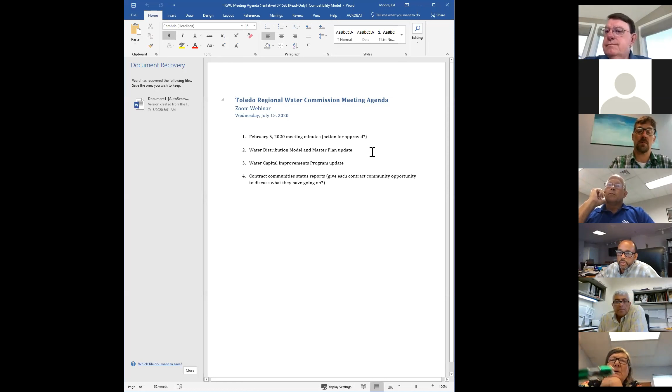No, Jim, as you know, we were going to do both the distribution model update along with the alternative water source update, but as we've said before, they're not ready for the alternative water source update. We'll do that at the next meeting, so it'll just be the distribution model and master plan by AE, along with the improvement program update.

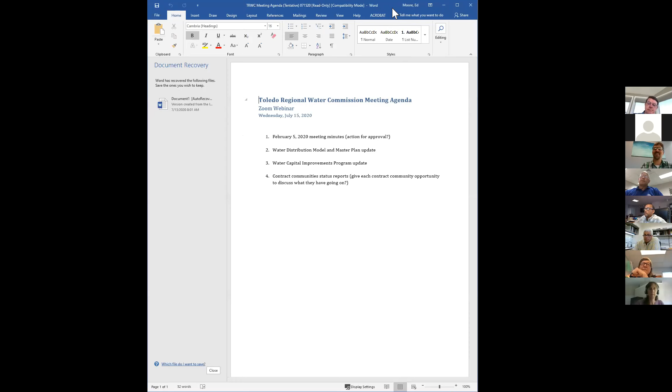I'll start with City of Toledo, Ed Moore, Director of Public Utilities. Patika. I have too many screens up. Patika Bannister, City of Toledo. Jim Shaw, Lucas County. Admiral Salem, Fulton County. Steve Pilcher, Village of White House. Tom Stalter, Northwestern Water and Sewer. Alice Godsey, City of Perrysburg.

And it looks like we have Kevin Aller on there, but he's muted. Kevin, you with us? It looks like he just dropped off. All right, we'll make a note of that when he returns. It appears that's it from the contract communities, unless I missed somebody. I'm not seeing any other communities right now.

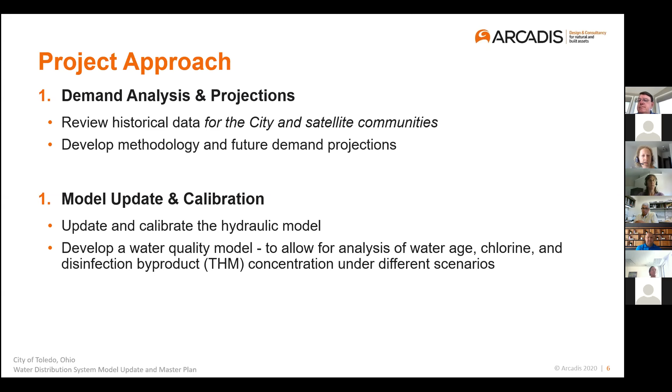Thanks, Jim, and good morning to everyone. Just describing the overall approach and the tasks involved in this project. There were four main efforts: the demand analysis, projections, and the model update and calibration. And those two really provided the tools that were needed to dig into the next two pieces. And then, again, the two pieces, the model simulations in order to evaluate conditions, which led into the storage alternatives analysis.

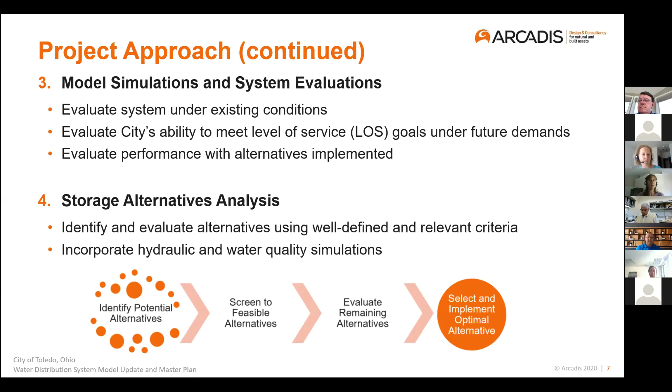So the first thing that we'll talk about is the demand analysis and projections.

We looked at three different types of usage for projections moving from now through 2040. The first was the City of Toledo and Lucas County customers. We looked at them in more detail because we had the billing data, and those customers are also directly included in the model.

So we looked at current usage per customer, including residential and business customers. We looked at expected future usage per capita and per employee, taking into account national, regional, and local trends in water usage, which in general are showing decreases in usage.

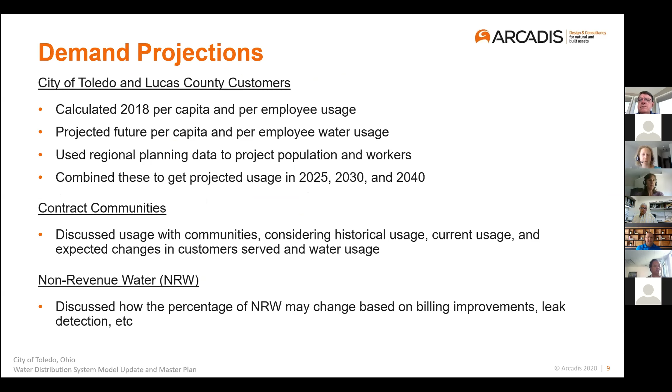For example, water saving appliances such as washing machines, dishwashers, and shower heads are resulting in decreased usage in households. We also considered regional planning data, including from TMACOG, the Toledo Metropolitan Area Council of Governments, and brought all that information together to get projected usage for 2025, 2030, and 2040, looking 20 years into the future.

We then looked at usage by the contract communities. We didn't have as much detailed analysis since those won't be directly modeled, but we worked with them to look at current usage and expected changes.

We also looked at non-revenue water. Toledo, like every utility, does not bill for all of the water that's produced, and that water can be lost in a variety of ways, including firefighting, leaks, and billing errors. So we looked at how that might change into the future to get these projections shown in this figure.

There'll actually be a contract community added in Oregon in the next several years that will increase system demand, and several communities are expecting growth, including significant industrial growth that will increase their usage.

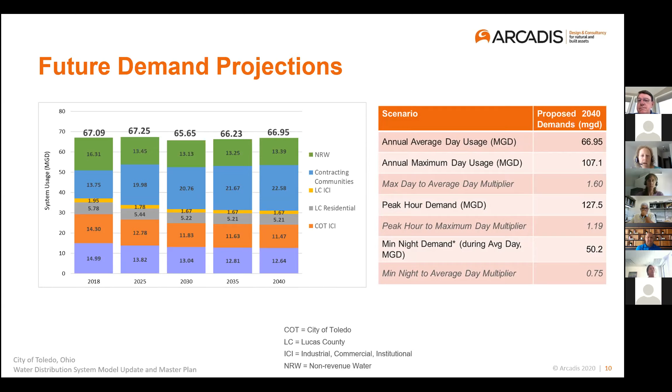That projection information was used in the model update and calibration. Instead of using the previous model and just tweaking it, we actually rebuilt the model based on the latest GIS, which ensured we had the most up-to-date and accurate information.

We also used billing data to do very specific and accurate allocation of demands, and we updated facility information to make sure we were matching the configuration of those facilities and how they actually operate.

For the contract communities, their pipes and facilities were not included directly in the model, but instead we used point demands and considered their usage, as well as SCADA data to look at how that usage is distributed.

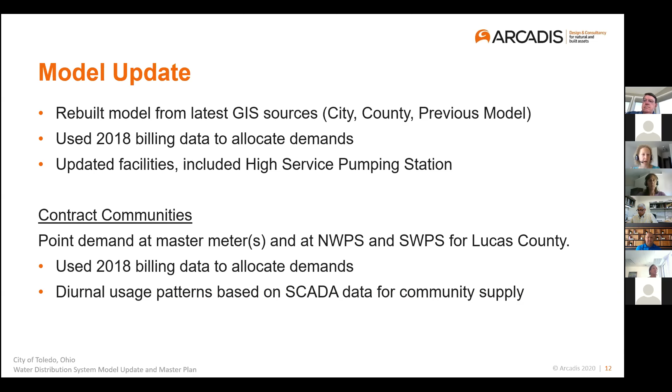After the model was developed, we moved to model calibration, which I'll describe quickly. The goal of calibration was to have the model results be within 7% of the observed value.

All of the SCADA data that was available was either used to set up the model or used to calibrate and check it. We did two types of scenarios: extended period simulations, looking at both an average day and a max day.

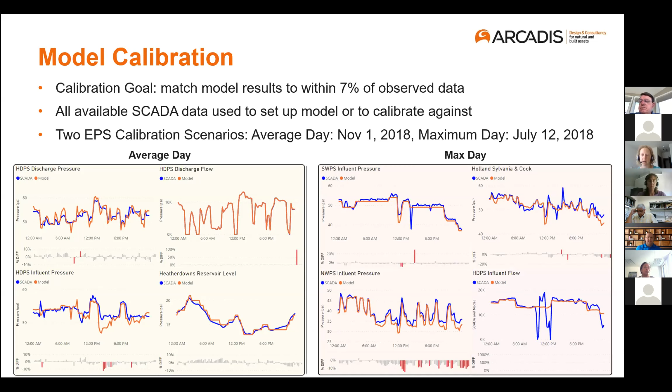Most of them match very closely in terms of actual values, as well as spikes, drops, and changes in the data. There were some differences, and the bottom right is an example of an area of the system that we had to dig into a bit more to get a better match. But at the time these figures were developed, that one had some issues.

I'm going to now turn it over to Jennifer to talk about the performance evaluation.

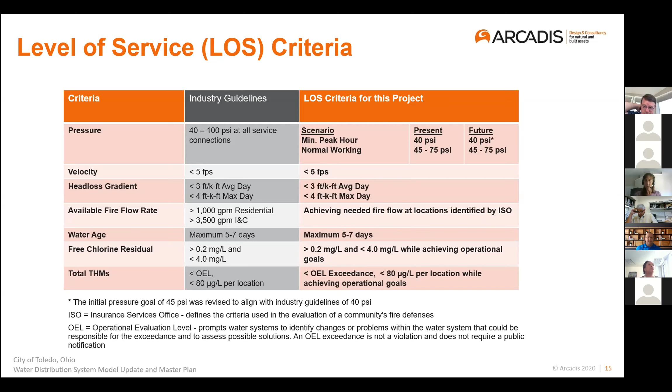In terms of the actual evaluations that we did in the system, all the evaluations were run under an extended period simulation, which represented a 24-hour period of time. This takes into account the diurnal water usage throughout the day, in which it brings in various times of the day when you have peak hour demands and you have low water usage demands as well. And so what we looked at in our model results was primarily minimum or maximum values, for example, minimum pressures during peak hour, or maximum pipe velocity during peak hour. So they all ended up corresponding to kind of the peak hour demand condition.

We looked at the existing system under the 2018 demands, as well as the 2040 projected demands. As Katie showed in the graph earlier, we don't really anticipate a huge overall change in demands throughout the planning horizon. So we felt comfortable with just looking at the beginning and the end time periods to look at anticipated changes in terms of deficiencies, where those deficiencies may be.

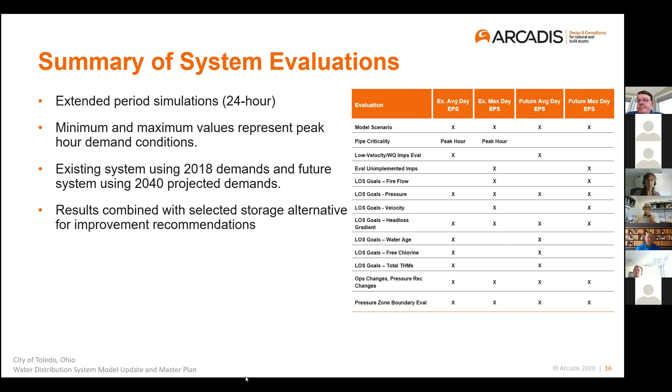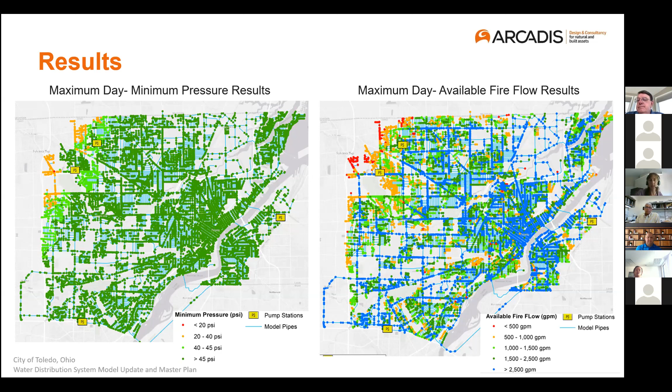This is just an example graph of some of the model results that were obtained. We did color coding of all the different criteria that were shown in the previous slides. This was an example on the left of, under the max day, what the minimum pressures were, and then on the right was an example of what the fire flow results would look like. And I believe these were under existing system demands. This was the initial. Again, these were just examples to show you how we were able to evaluate the locations of these deficiencies.

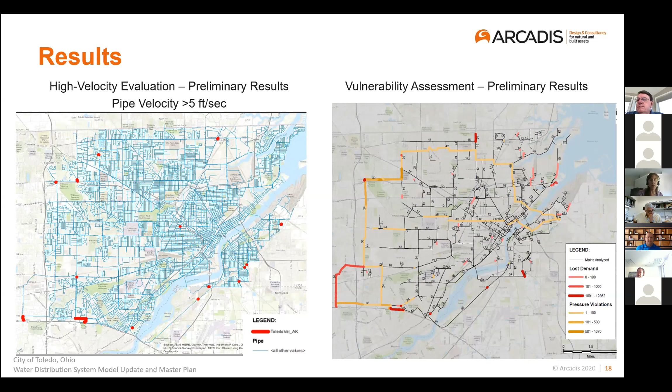And then the next slide here just shows an example of the high pipe velocity evaluation, locations where we saw greater than 5 feet per second. And then on the right, this was a separate criticality analysis where we were looking at the water mains: if a specific water main was taken out of service, either for maintenance repair or under a leakage condition, where would be the areas that would be most vulnerable to not being able to provide adequate pressure, as well as just being able to provide supply to customers.

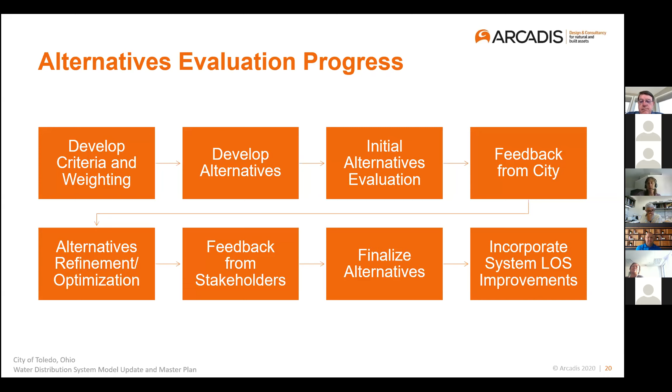Moving on to the storage improvements alternative. Again, this was a separate analysis that was done. This is just kind of a flow chart of how this alternatives evaluation progressed. We started out by developing various criteria and weighting for 4 different alternatives for adding storage to the system. We developed the alternatives. We presented that to the city, received some initial feedback, refined those alternatives, presented that to the stakeholders, which Jim had mentioned earlier in one of our meetings with the stakeholders, finalized those alternatives, and then we incorporated those into our overall recommendations.

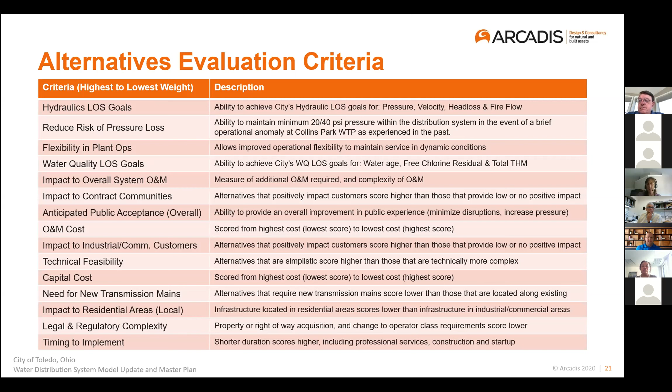So I'm going to just go into the 4 alternatives that were selected to evaluate. This first alternative, this is alternative number 1. This consists of adding 4 new 2 MG, million-gallon elevated tanks to the system. These were kind of scattered throughout.

There was more elevated storage on the west side of the system, which has the higher elevations, and it was in need of additional pressure in those areas. So we have one kind of in the northwest, one on the very west side of the system, one in the south, and then one close to the plant as well.

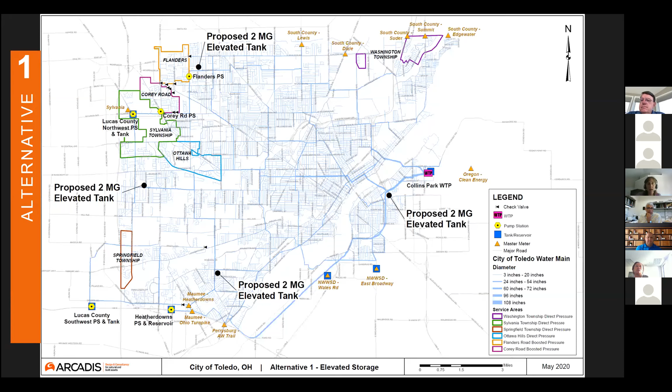And there's a little bit more detail describing alternative 1 again. The top is a description, those 4 elevated tanks, 2 MG each, ground elevations between 120 and 160 feet. And the locations for those elevated tanks were selected to try to maintain pressure during a brief high service pump station outage. And so that was what we were looking at, trying to maintain those pressures throughout the system. This alternative would not result in any changes to the current pressure zones.

It did show that there would be a challenge with just turning over the tanks because the pumps currently that pump from the high service pump station at the plant are trying to maintain a certain pressure, and so you don't get the turnover that you need necessarily within the tanks unless you change your operations. And so this also would result in a slight increase of water age.

Some of the benefits of this alternative were that this would have the lowest time to implement and the lowest impact on operations and maintenance. And so the table on the right just shows our overall scoring for each one of those criteria as it relates to alternative 1.

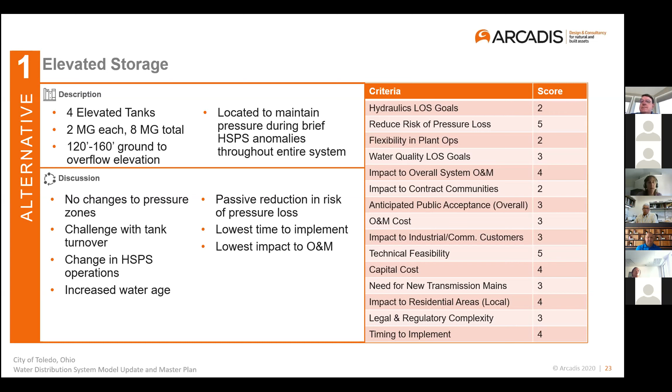Alternative 2 is very similar to alternative 1. It has the same 4 2 million gallon tanks added to the system. The only difference with this alternative is that there's a second independent high service pump station at the Collins Park water treatment plant. And this was specifically added to this alternative to try to address the issues with power outages at the plant and the lowering of pressures that have been seen throughout the system, to try to provide a secondary supply pump station to the system.

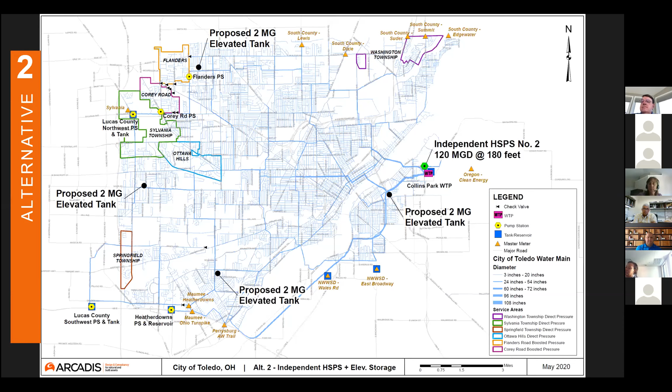So again, the summary table gives the description at the top in terms of the technical impact. This one would be the highest capital cost alternative, just with having to construct an entirely new pump station to supply the entire system. And overall system benefit was not very high for the actual cost of this. And this addressed the risk associated with having facilities at a single site.

So again, the criteria scoring for this alternative is shown on the right here. And I'll get to a table at the very end that shows the total score for each one of these alternatives.

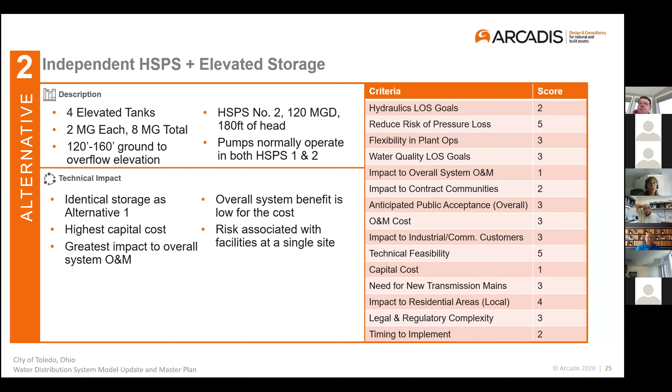Alternative 3, the big difference between this alternative and the previous alternatives is that we're adding a pressure zone boundary. Under this alternative, it's what we call a soft boundary, which means that there are certain locations where there will be closed pipes to try to maintain higher pressures on the west side of the system, but there will also be a lot of opened pipes, primarily smaller diameter pipes, to allow water to flow back and forth between the two boundary zones.

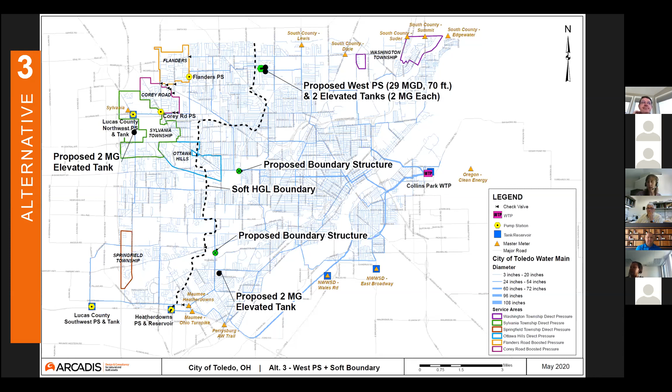This also included additional tanks. We have one tank in the south again, one a little bit further north in the northwest area of the system, and then we actually have two elevated storage tanks in the north now, and we do not have a tank near the plant under this alternative. Again, the overall summary for this alternative is presented in this slide.

Under this alternative, one of the things to mention is that the Corey Road and the Flanders boosted pressure zones would remain as is. There would be no anticipated changes to those particular areas. This would just be mainly adding a higher pressure area to the west side of the system in addition to those two boosted pressure zones. Under this alternative, Heatherdowns Pump Station would also remain as is. The pumps would just be basically operating at a different point on their curve.

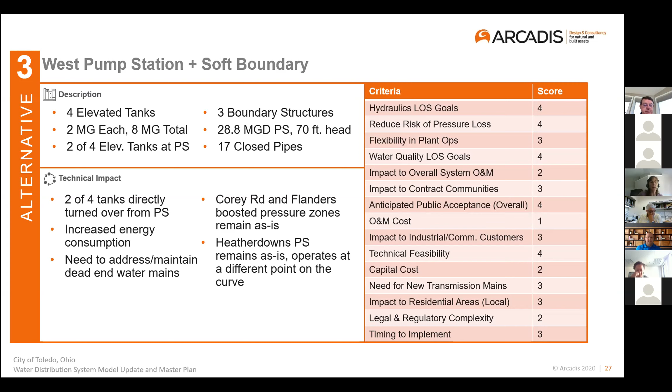And then for the final alternative, this is where we have the pressure zone boundary in place, but it's a hard boundary, which means that we're closing off, we're maintaining pressures at a different hydraulic grade line to the west of that boundary than at the east. That means that the plant can be pumping at basically the same head or maybe even a lower head than it is currently to just maintain pressures east of that boundary.

And then we have some upgrades that would be needed at the Heatherdowns Pump Station to increase the hydraulic grade to the left of that boundary, to the west. And we have the addition of a new pump station as well on the north side of the system. And the tanks are very similar to alternative 3.

So this again is just that overall summary slide. Under this alternative, Corey Road and Flanders boosted pump stations would be removed. So that would mean we would open up all the pressure zone boundaries in the northwest side of the system. And those two pump stations would be able to be decommissioned, and then all of your pumping would be located either at Heatherdowns or the new proposed west pump station.

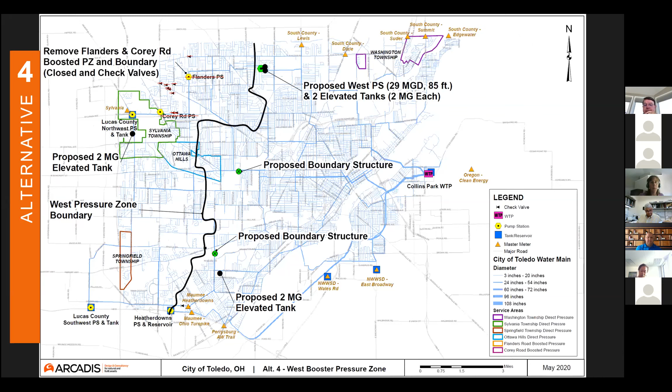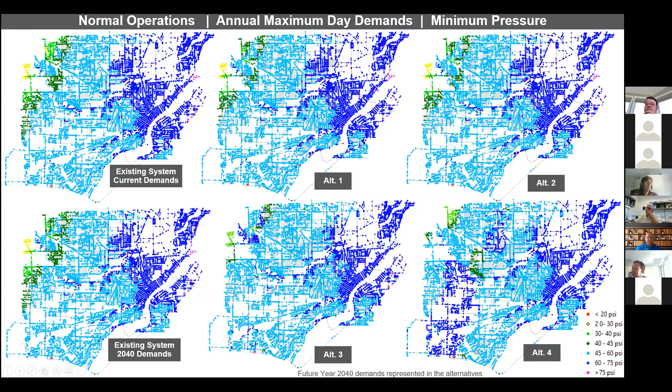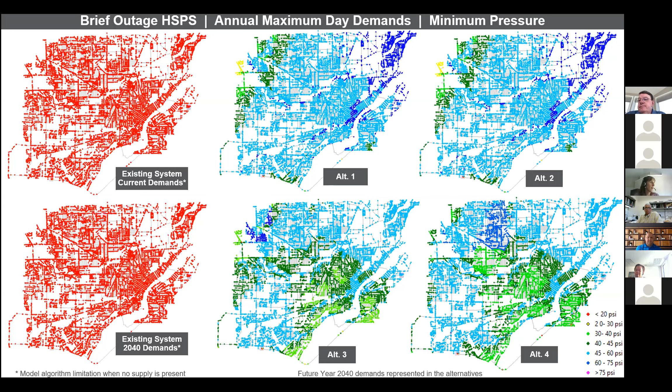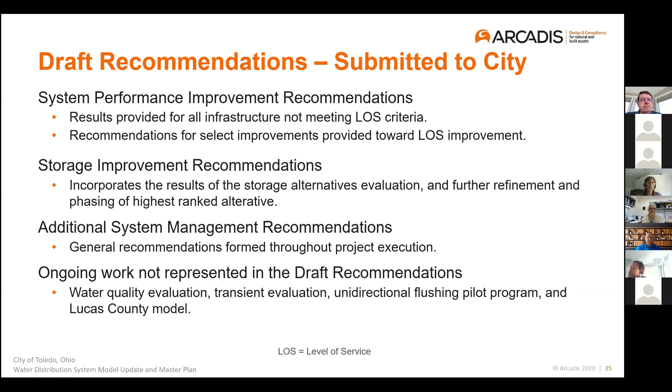And so at this point, we've submitted those recommendations to the city. We still need to get some comments back in order to finalize our draft report. We plan to present the final recommendations to the stakeholder group. After that, everything will be submitted in draft format to Ohio EPA for their comments. And then it'll be finalized and presented again to this Regional Water Commission. The deadline for submittal of the general plan to Ohio EPA is December 31st of this year. So that summarizes the overall project and where we're at this point. Are there any questions?

Yeah, are there details related to how much effort can be made to estimate cost? Yeah, so we're developing planning level costs at this point. They will be included in the draft report. We've also presented at this point a recommendation for phasing of improvements, but we still need to talk that out with the city and determine what makes sense to them in terms of those phased improvements. Thank you.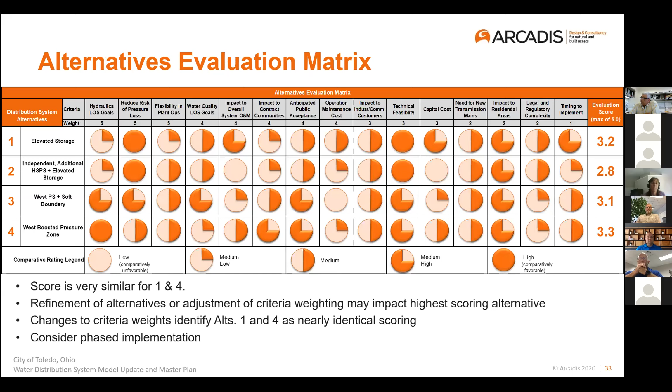I have a question about the water age. This is for Arcadis. Looking at alternate 1 and 2 versus the other ones, it looks like alternate 3 and 4 are adding more days, probably up to 3 days on the water age, more specifically the southwest corner of the distribution system. So I don't know if that's going to have a negative impact on us in Fulton County. The water, once it comes to us, is going to be up to 3 more days older. I don't know if that's something that's being considered as part of your evaluation and recommendations for the satellite communities.

Yes, when we talked about next steps, we're currently working on a water quality model that'll simulate free chlorine residuals and disinfection byproducts. So two pieces to the response. One is water age is increasing. In general, it's not increasing too much. Remember, our level of service goal, which aligns with industry practices, is to keep water age within 5 to 7 days. The average water age during existing system conditions right now within the city is 1.1 days. And we're increasing that average to just under 2 days.

So certainly when you have the same demands but you increase the volume, you're going to increase water age. As a result, with that water quality model, we'll be looking at what we can do to maintain water quality, which is really what we are all most concerned about. Compared to other utilities, though, the water age is extremely low for the Toledo system.

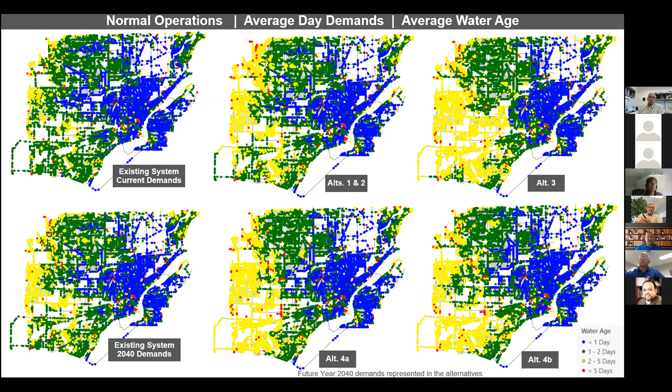Great. Hey, Jim, this is Jim Cooper. I guess I would just like to close with, throughout this alternative and throughout the project, we've talked about coordinating with the various stakeholders in the various cities and the contract communities. That will be continuing as a part of the next steps. Certainly we'll be having another meeting coming up in August, as you saw at the beginning of the presentation. So if any of the contract communities have any additional questions, certainly prepare those, and we'll be discussing the final results at that meeting.

Very good, thank you. And I did see a reply, and the request was to have Andrea contact Eric at Channel 11. Okay. As far as other items on the agenda, we can open up to any other updates from the contract communities. If we want to start with the city of Toledo. I think you skipped over number 3 there, Jim. Oh, Water Capital Improvements Program update. Okay, I thought you were holding off on that one. Go ahead and start with that, if you will, Ed. Okay, well, I'll just defer to Warren, and Warren's going to update us on the water. Thank you.

Mr. Chairman, I suggest this be held off because the materials were sent out so late. I know an earlier version of the capital improvement plan was sent out 2 months ago, but there was a new update this morning. So unless there's something urgent, I suggest that this be adjourned until there's time to review the material that was sent out. Are you making a motion to adjourn? I would first like to hear if there's anything urgent that needs to be dealt with today.